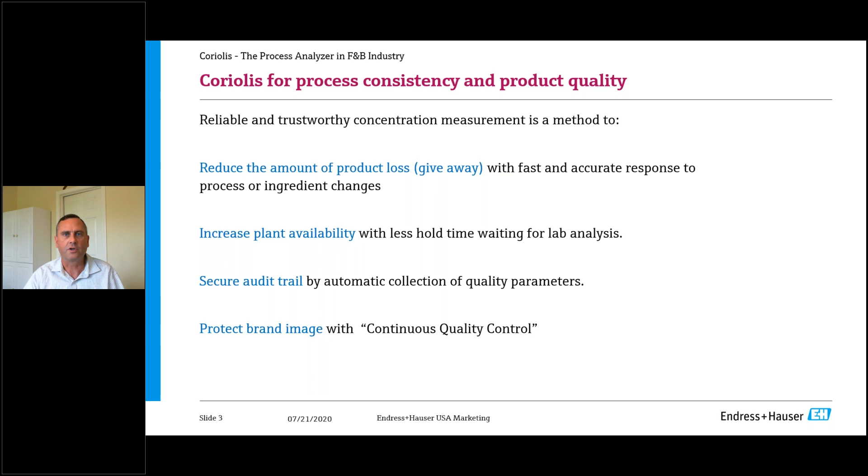And while they're doing this, for audits and recipe management and other things, you get a continuous record of all the production protocols, recipes, and so on that's going on there. And ultimately, that then brings to protecting the brand image. Consumers are expecting to get a certain product with a certain quality, and concentration ties very much to that. So Adam, there you go.

The basis or the foundation for concentration measurement using Coriolis mass flow meters is the density. So we look at the density of a product, of two products. This is very important to keep in mind, that you really need to be in a binary type of solution. So you have a carrier fluid and then a secondary one, and you're looking at what the total concentration is there. It's really not possible to do it with more than two variables, because then the density could be affected by that third component. So think about it: if you have two variables, then density can be used for concentration measurement. If you have other mixtures, then you may need to look at other types of measurement to get the correct measurement performance and accuracy that you're looking for there.

And subsequently, that affects the overall performance. In the food industry particularly, we're looking at a large number of different products. The most common one is probably Brix measurement of the concentration of sugar in syrups or in high fructose corn syrup or other type of sweetened products.

In a brewery, we're looking at the wort extract, which is directly related to the efficiency of the brew house. We can look at fat in cream, for example, percent alcohol or proof measurement, starches, and other applications. Adam will touch on a very exciting application recently made possible with Coriolis meters, and that's overrun—looking at air in product, the most typical being the amount of air during ice cream production. Aside from that, there are chemical applications too, like concentration of various acids and caustics, where you can use density as a measurement to arrive at a concentration measurement.

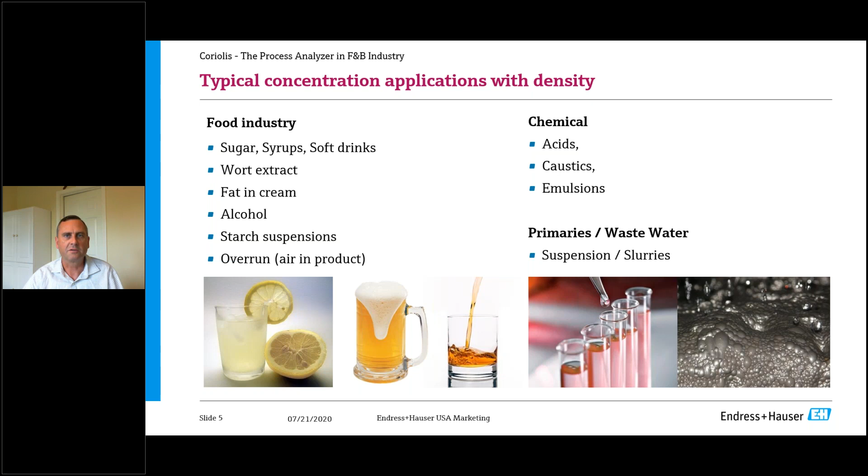And with that, I will hand over to Adam to cover the more technical aspects of Coriolis and density concentration.

Thank you, Ola. So we're going to continue with this density vein that Ola mentioned. Many different fluids have varying densities depending on what the fluid is, and also what temperature or pressure the fluid's at. Based on this density measurement, we're able to determine the concentration, or the ratio of one fluid to another, because a fluid is going to have a known density. So if these two components change their ratio—for example, if you have water and oil, and the percentage of water in the oil shifts—then that total density is going to change as well. If we know the temperature and the density, with some math we're able to determine the concentration. In the picture, you can see some everyday items and, based on their density, how they sit in a cup.

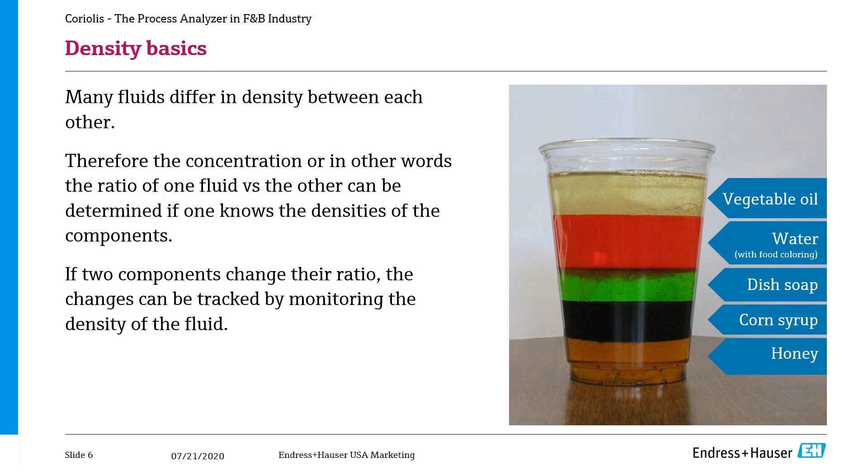Building on this a bit more, there are two different ways to look at concentration: a mass basis and a volume basis. On the left-hand side, we're looking at it in terms of a volume basis. We have two different fluids. Fluid 1 has a density of 1 gram per cc at 68 degrees Fahrenheit, and fluid 2 has a density of 2 grams per cc at the same temperature. If we look at it from a volume basis, they both make up half of that mixture. But if you look at it by mass fraction, due to the lower density of fluid 1, it's actually a 1/3, 2/3 split.

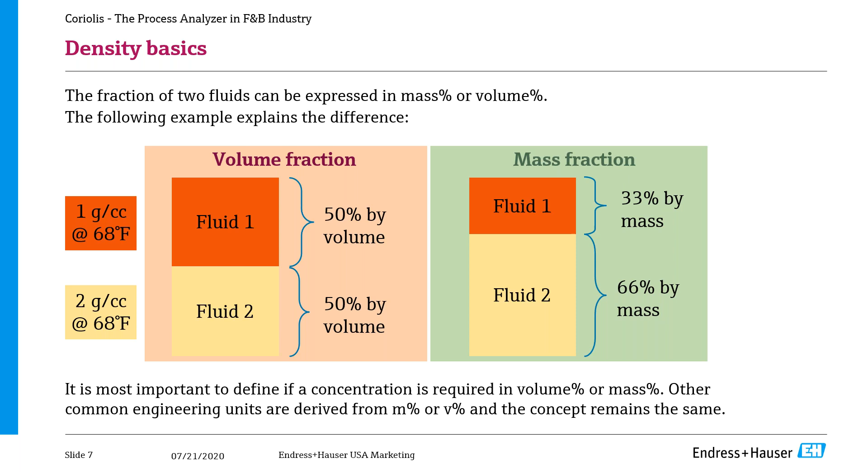The real point here is that the volume fraction is affected by temperature, so this is when an expansion coefficient would have to come into play, but mass is not affected by temperature. As we get into more details and examples, you'll see some of these are split between mass or volume basis. In our Coriolis meters, you can determine and choose which works best for your application and process, and you can even use custom units.

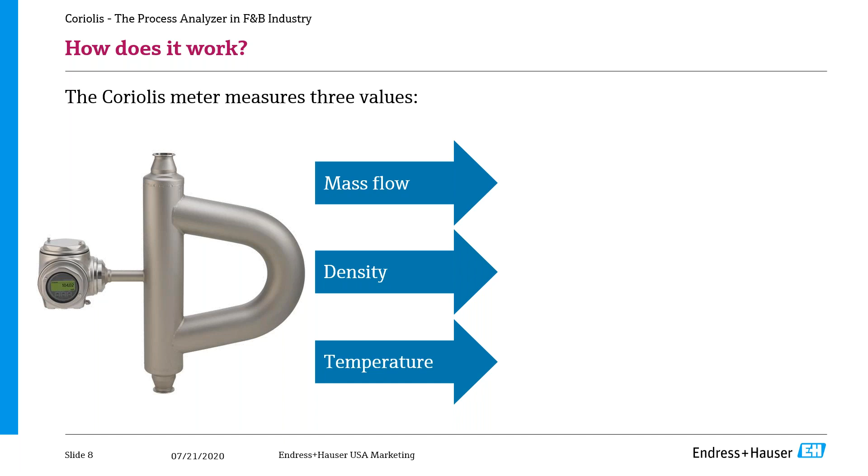So how does this all work with a Coriolis meter? For example, up on the screen is a picture of our Promass Q Coriolis sensor. A traditional Coriolis meter measures 3 different parameters: mass flow, in pounds per minute or kilograms per hour; density, in grams per cc or pounds per foot cubed; and temperature. Those are the 3 direct measurements that a Coriolis meter provides.

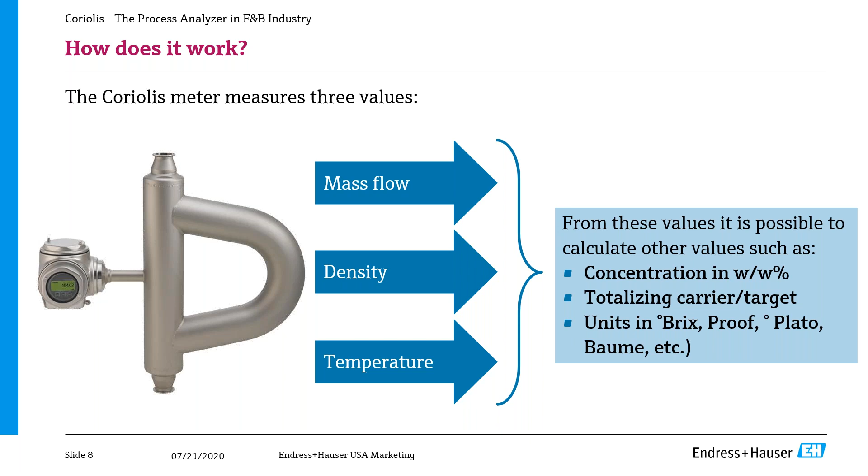From these 3 values, it's possible to calculate concentration in a weight percentage or a mass percentage, or as a volume percentage, and some of the units Ola mentioned earlier, like Brix, proof measurement, degrees Plato, Baume, etc. You'll see how this actually works inside of our Coriolis meter in a few slides.

There's really one main point I want to drive home here, and Ola did mention it earlier: if a fluid consists of more than just 2 components, only 2 of those components can change in order to make an accurate measurement. For example, if you have 3 or 4 components and all of them are constantly changing composition, then we're not able to make an accurate measurement because we're dealing with multiple changing densities over a temperature range. So only 2 components of a solution can change in order to provide an accurate concentration measurement.

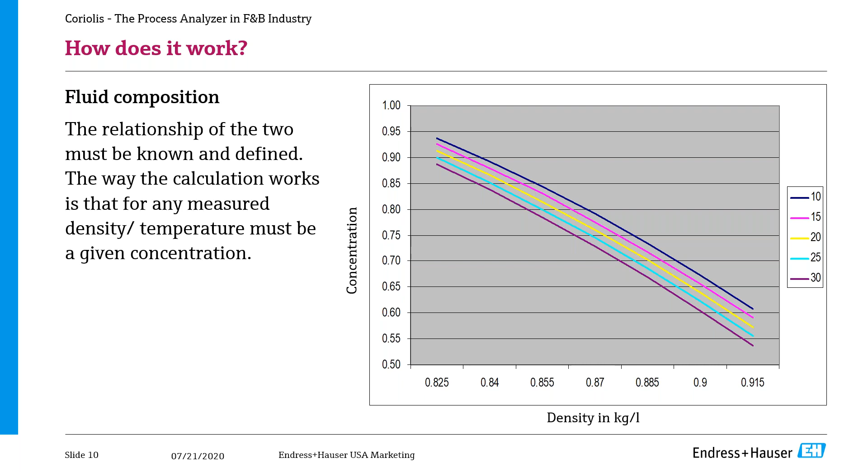So what does it look like on a device level? If you order one of our Coriolis meters with the concentration package, that's actually built into the model code. It's something you have to select. It doesn't come as standard.

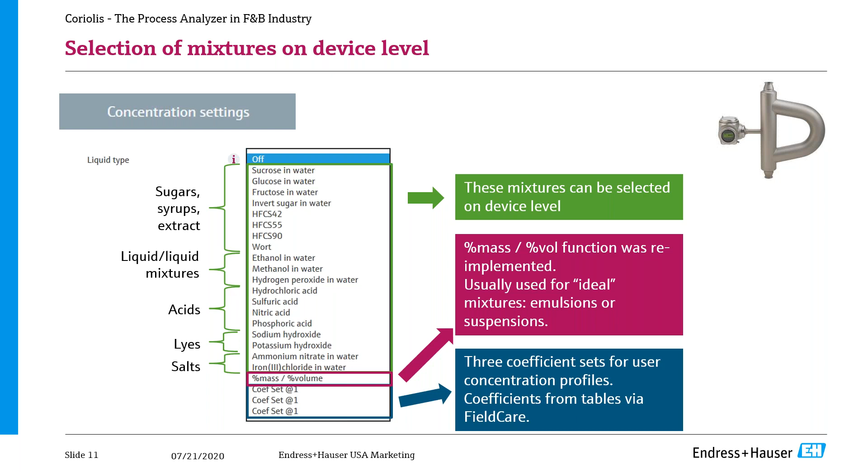So if your mixture or solution isn't one of the predefined ones in this list, we can help you create your own data table and data set, then put in custom coefficients. At the bottom we have 3 separate coefficient sets, so those are 3 custom coefficient tables. If you're running 3 different solutions on the same Coriolis meter, you can store up to 3 coefficients to use for each.

Once you select one of those liquid types, depending on what you select, these are the standard units we offer. You can see degrees Brix, Plato, Balling, and things like that. But you might also notice we have a user concentration unit. So if you want a custom one, you can type in and say, I want it to be X, Y, or Z. Very customizable.

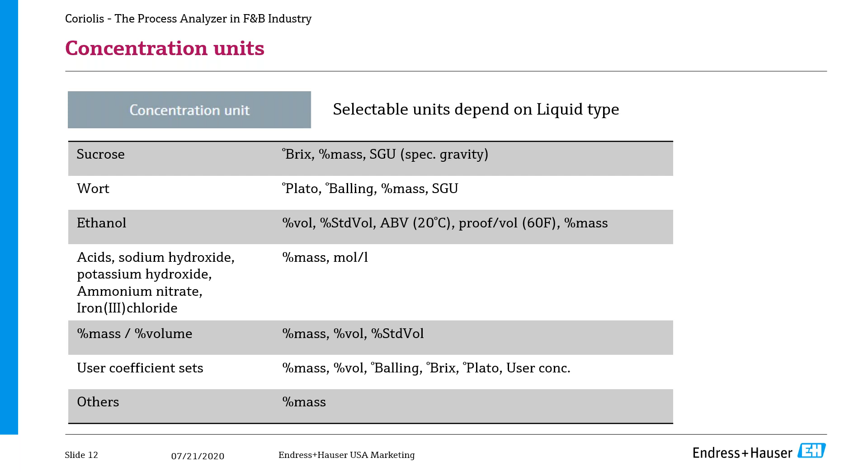Some of the new updates we've done: with our newer concentration package, we no longer use data tables, we use direct formulas. This comes straight from the ICUMSA, and you can Google this as well. Here is the standardized formula to analyze sugar concentrations. For percent mass, or just the Brix, it's calculated directly from the measured density and the temperature.

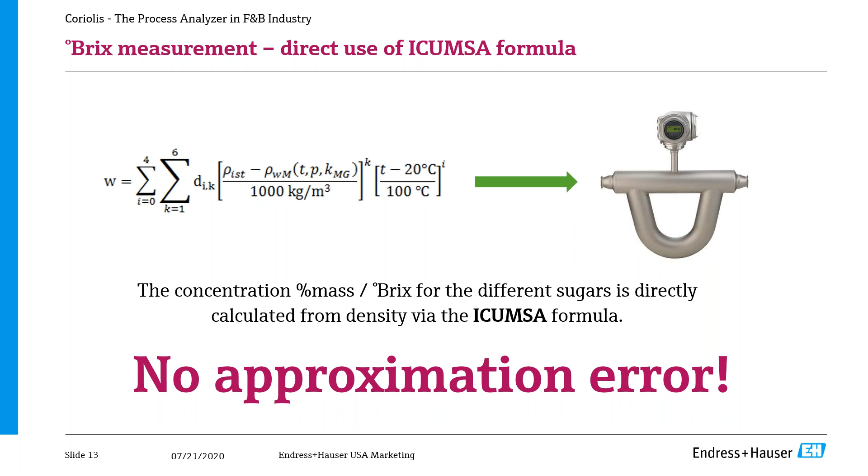So what does this really mean? In the past, traditional Coriolis meters would have tables built into them inside the electronics. For example, sucrose and water would have a data table showing densities, temperatures, and associated concentrations. At the end of the day, if you're using data tables, you're going to end up with some sort of approximation error. But now that we use the direct formula inside our meter, we no longer have approximation error. So what does that actually mean in terms of the accuracy of our measurement?

On our website, publicly available, we have a sizing program called Applicator, with a specific module for sizing and selecting concentration measurement. For example, here I chose a liquid concentration of aqueous sucrose, and put it in on a mass basis from 0 to 100%. You put in your temperature and pressure, and you can see it's water and aqueous sucrose. At the very bottom right, you can see what the error would be. In this case, we'd be at 0.05% mass, or 0.05 degrees Brix.

Of course that'll change depending on what sensor you choose and what concentration target range you choose. For example, if we did just 0 to 50% instead of 0 to 100%, that would change. But this is available on our website, you can go use this and play around with it. A very cool feature.

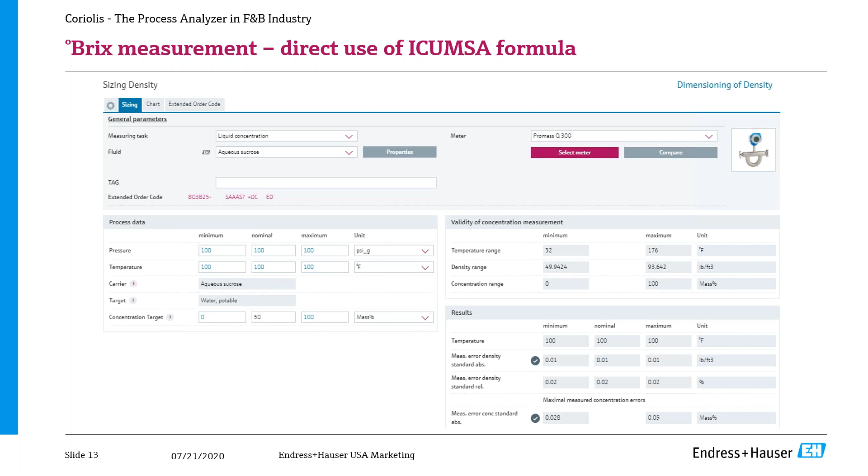We didn't only do this for Brix measurement, we also did this for proof and alcohol measurement. Again, there's a direct formula inside our transmitters, the Bettin-Spieweck formula, formulated in 1990. You can see it's a very long equation. We don't need to go into detail about what every part means.

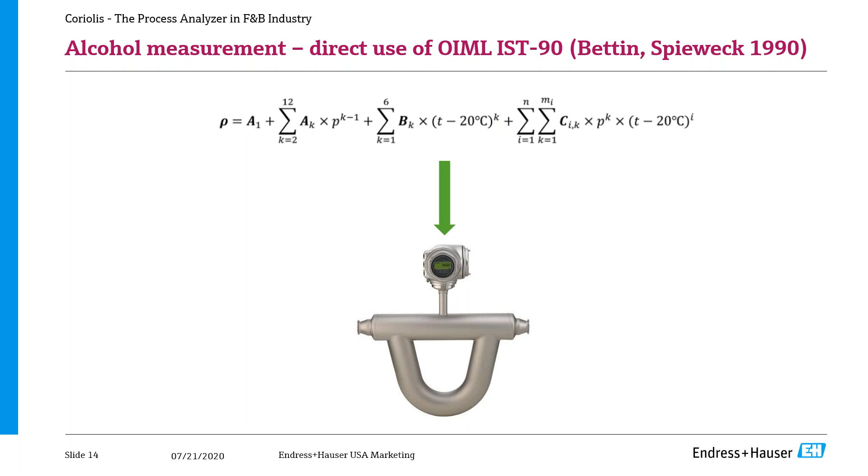But at the end of the day, you can go into our meters, and what you're seeing here is a screenshot from an integrated web server, included in all our Coriolis meters and most of our flow technology. You can set it up for ethanol and water, and get a list of units: ABV, alcohol by volume, proof terms, or just percent volume or percent mass. I set it up for proof, and here's a simulated display showing we're measuring 75.42 proof. This web server is built into all of our flow technologies, you don't need any special hardware or software to access this.

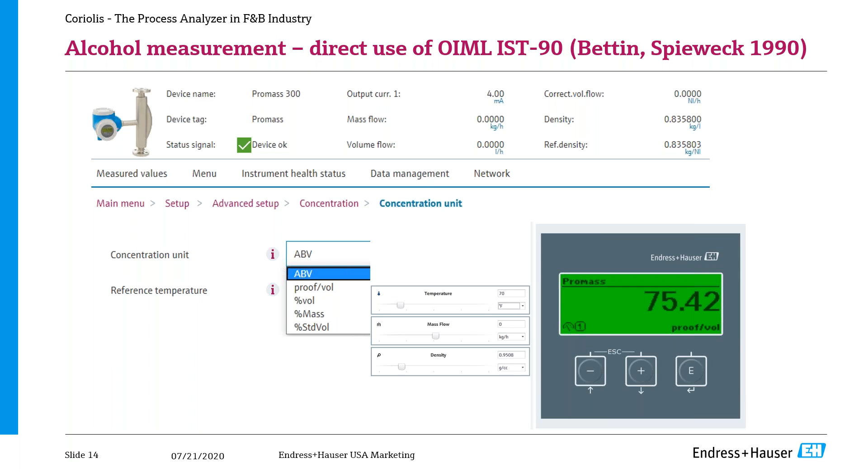Ola specifically mentioned this application earlier about percent overrun measurement. What this is, is the overrun is the amount of air in a whipped product - the amount of air that's injected into, say, a whipped yogurt, or the big one, ice cream. It's probably the most difficult.

Endress+Hauser has put together a complete solution to measure the percent overrun using our Promass Q Coriolis meter. We also have two pressure transmitters, and a PLC that's able to run all the calculations based on the measured variables. The density of the liquid mix is determined before the gas injection based on the Promass Q, and then by measuring the inlet and outlet pressure, we're able to determine how much air is actually in there, and with the math functions in the PLC, provide that measurement.

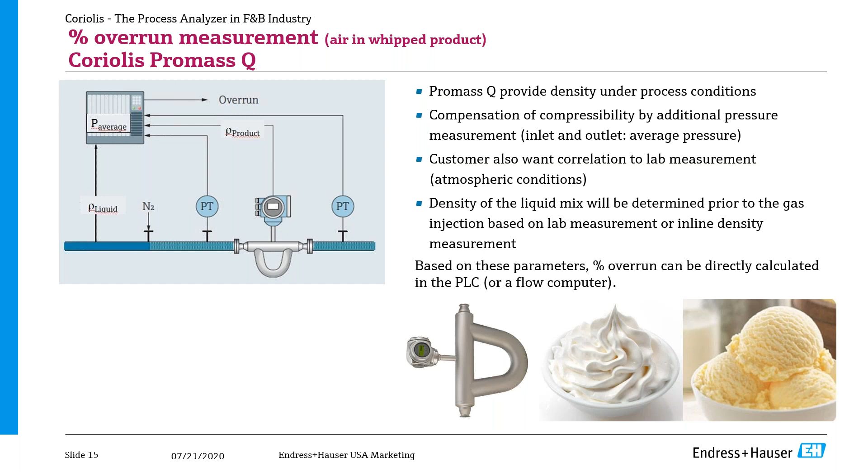We do have one of the handouts that Nikki mentioned, specifically detailing the solution and how we accomplish it, and we also have some references that we can share if you're interested.

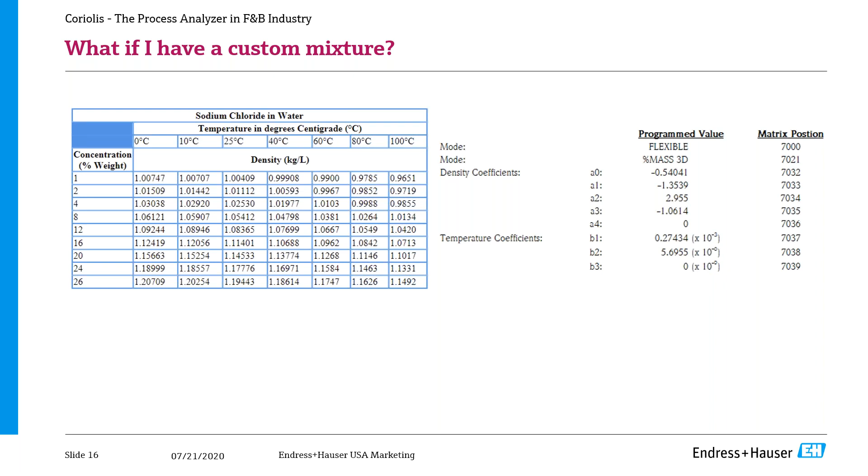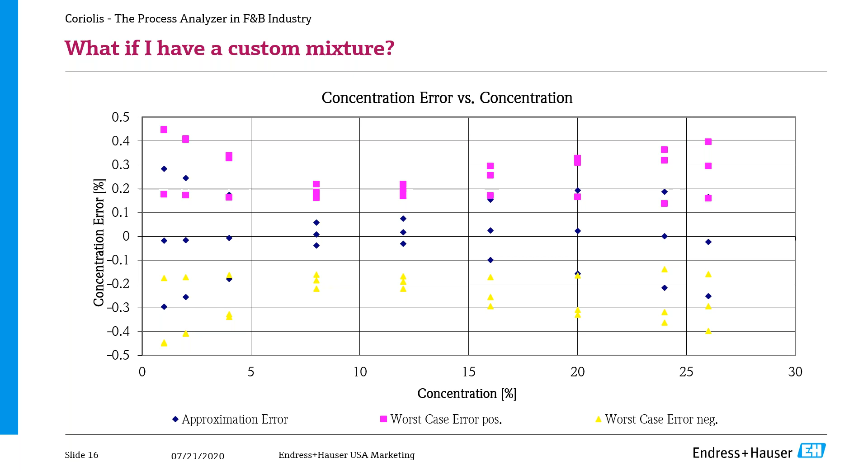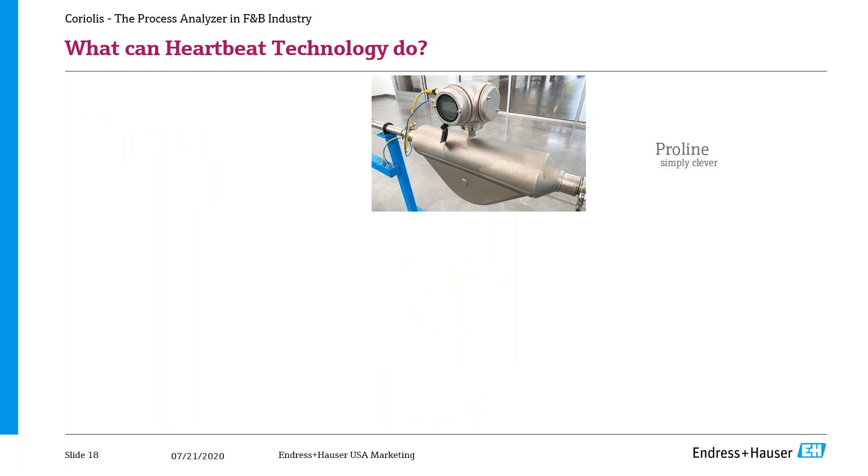The last thing I want to touch on here is heartbeat technology. Heartbeat technology has three facets. It ensures consistent measuring performance, looking at the quality, safety, and availability of one of our devices. So what can it actually do? It starts with one of our Coriolis meters.

The first pillar underneath the umbrella of heartbeat technology is heartbeat diagnostics. This is continuous self-monitoring that the device performs on its own, with diagnostic symbols designed according to NAMUR NE107. Think about it like the dashboard on your car - if you have a flat tire, a critical failure, or the battery's dead, our devices, according to the severity of the diagnostic, the screens will flash red if it's a critical failure, or tell you it's out of specification if your 4 to 20 output is ranged incorrectly, or something like that.

Moving to the right, probably one of the most exciting pieces of heartbeat technology is the verification itself. This is an onboard self-verification in the device that can be run on demand without process interruption. At the end of the day, when you run a verification, you can pull the verification report in PDF format directly from that integrated web server that I showed earlier. This verification is attested by a third-party TUV to ensure ISO 9001 traceability.

We can state whatever we want about heartbeat verification, but we went the extra mile to that third-party TUV, and we have all these attestations depending on what technology and sensor it is. So if you have any questions or need one of those, please let us know and we can provide those.

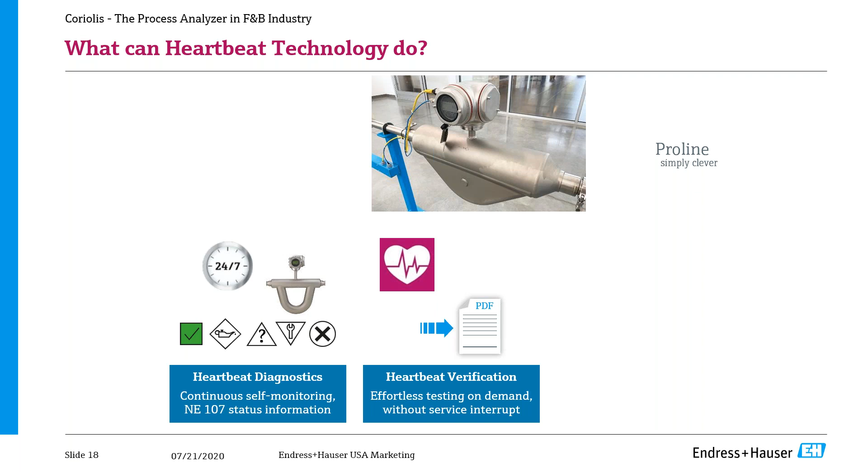And then lastly is heartbeat monitoring. This is really giving you a window into your process and can help with preventative maintenance. You can look at buildup, corrosion, or erosion, and heartbeat monitoring allows you to output some of these specific sensor test points that are tied directly to some of these process impacts.

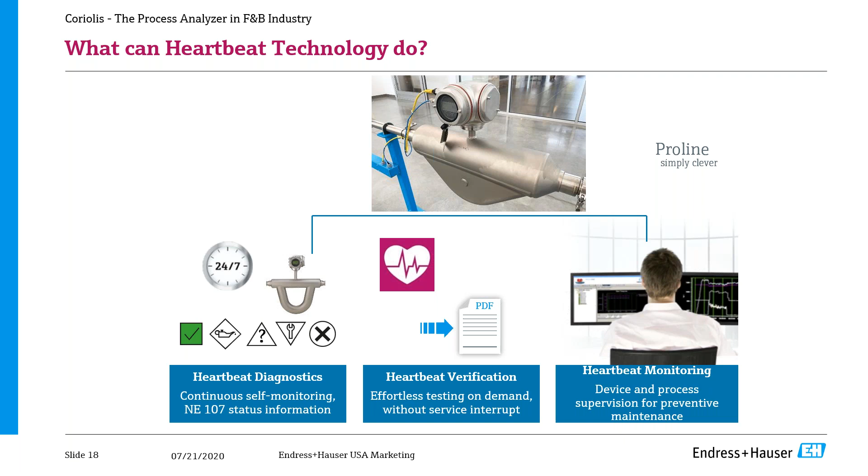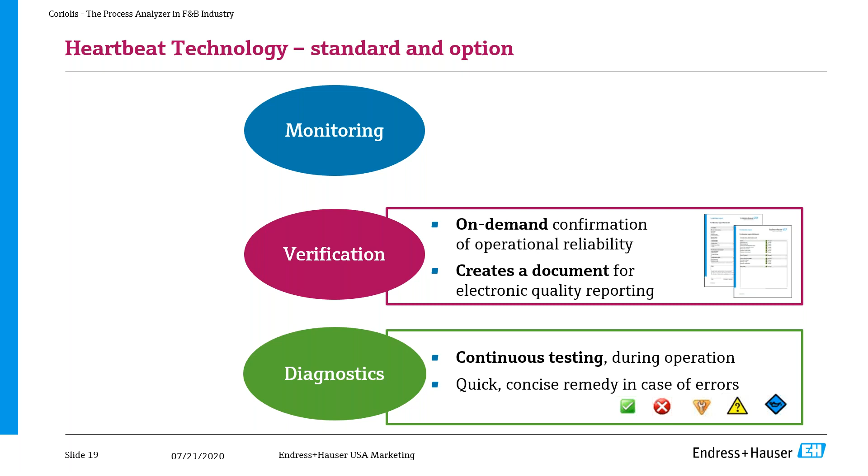So looking at the three of these again: we have the diagnostics, which is the continuous testing and error messages, and they even provide remedy-based diagnostics - it'll tell you to check for gas in your process or check your wiring, etc. Then there's the verification and the monitoring. The diagnostics piece is standard on all of our flow devices, and the verification and monitoring come together in a package that's optional, very similar to the concentration package I talked about earlier.

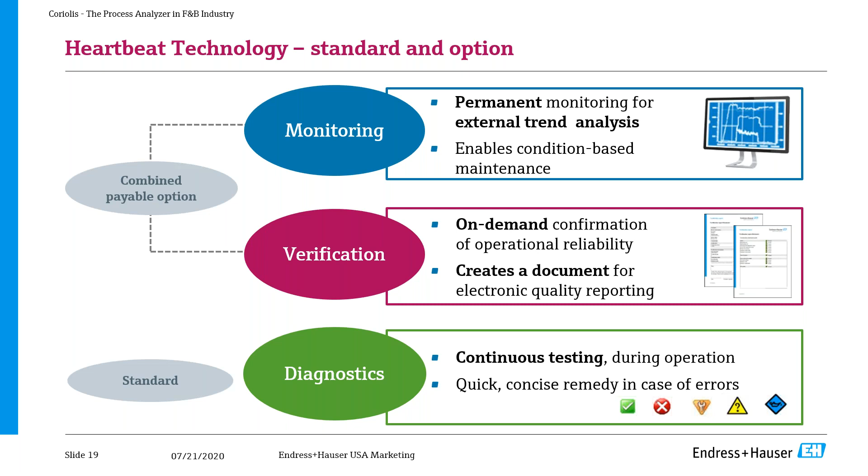I wanted to show you some cool examples of the heartbeat monitoring. We have a value from the sensor called the heartbeat sensor integrity, or HBSI. By monitoring the HBSI, you can get a window into the process to see if you have any of these impacts happening, like entrained gas, suspended solids, corrosion, cavitation, etc.

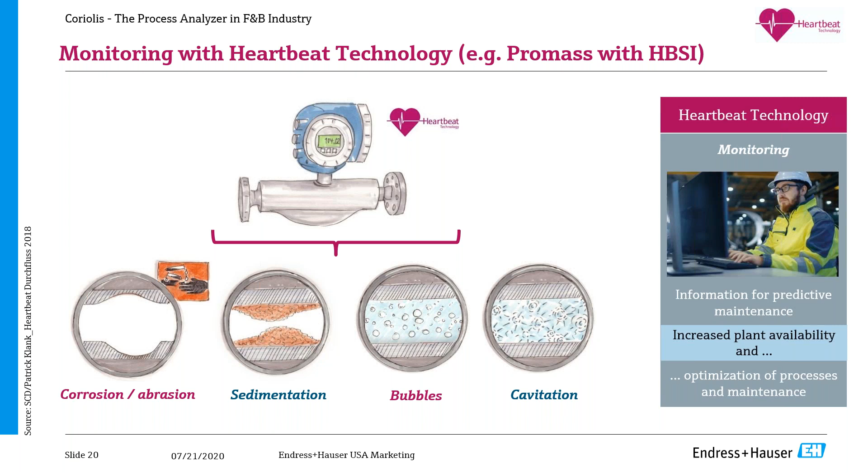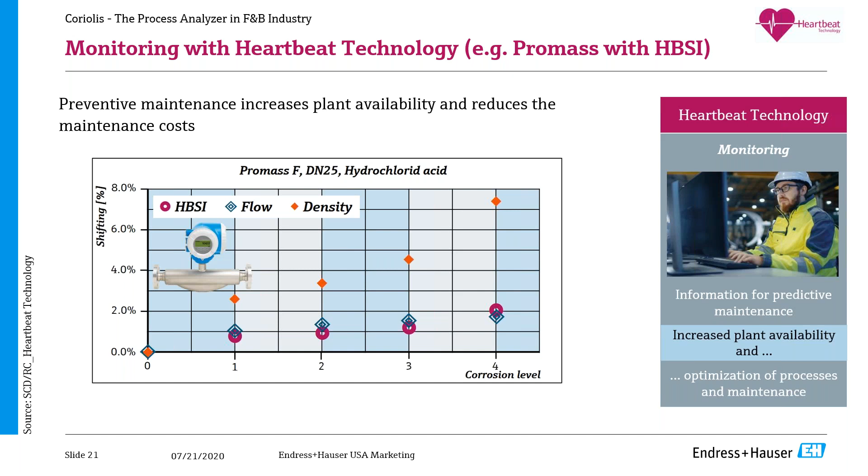So what you can see here is we have the HBSI value along with flow and density. This was an example on hydrochloric acid. You can see what happened was the density started to shift. Then the HBSI and the flow started to shift as well as the corrosion level increased. But just by monitoring the HBSI along with flow and density, you would have been able to see a shift very early on, instead of having to wait until you saw an 8% shift in density.

So looking at it in terms of coating, when the HBSI value was intact, we saw barely a shift at all, of 0.0023%. But then when we had actual fouling occur, you could see a noticeable shift of almost 1%.

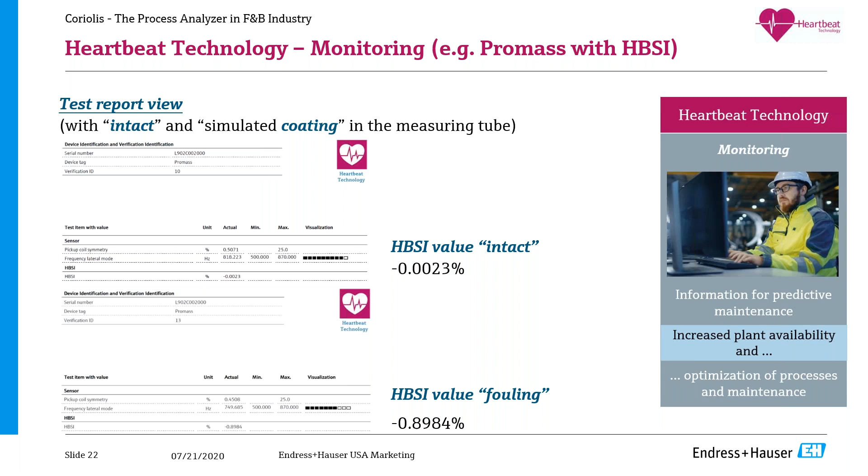So just to wrap it up, what makes heartbeat technology unique? The reliability aspect really comes to the traceable and redundant references that are inside the device to perform that verification, attested by a third party.

So how do we get all this data from the device itself? We offer a full range of digital communications not only on our flow technology, but across all of our technologies - level, analytical, pressure, etc. So that's looking, we have HART, we have Modbus, and then we also have Ethernet IP and Profinet. Especially using Ethernet IP or Modbus, you're able to very easily pull all this data from the device. And this is consistent across, like I mentioned, not only our flow portfolio, but across all of our technologies. This heartbeat technology with the diagnostics, the verification, monitoring, you'll see that across all of our principles.